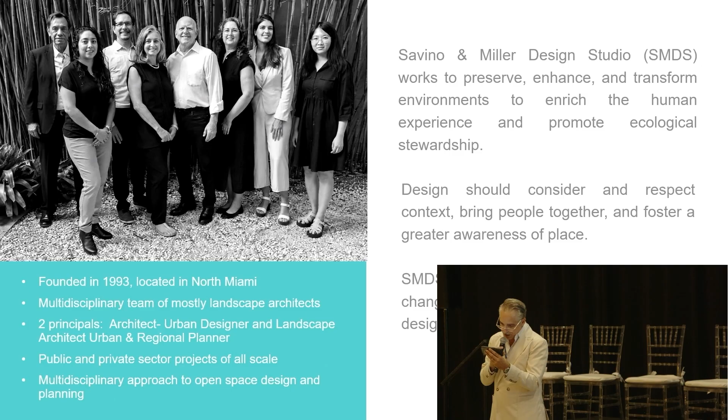Now, to help frame the panel, please welcome Patricia Matamoros, Brian Harrison, and Barry Miller from Savino and Miller Design Studio, a landscape architecture, urban design, and master planning design studio that works to preserve, enhance, and transform environments with purpose to enrich human experience and promote ecological stewardship. Their coastal resilient parks, such as Bayshore Park, Brittany Park, and various projects, showcase the role of nature and foster social connection with place without compromising nature.

Well, thank you very much. I'm Barry Miller. Joining me today, there's Brian Harrison and Patty Matamoros. These are the diehards here, right? Hanging in there till 5 after 5. So thanks for sticking around. As a Miami native and have been working here for God knows how long, right, Aida?

We're really excited about this opportunity to speak with like-minded people. A lot of the things we've been hearing today are right over the backstop in terms of data points and the science of it. But it's great to see that you're all communing together for a common cause. What's the common cause? We want to protect and restore Biscayne Bay. That's number one. So we want to do everything we can to do that by shaping policy and trying to move politicians and the grant funders, et cetera, to fund these projects.

How do we do that? We think as landscape architects, we want to make the site enjoyable. We want to make it fun to go to, useful, recreational, et cetera. That builds consensus. When you do that, that's when people start to come together and talk to their politicians of how great this is. Can we do this here? Can we do it in my neighborhood?

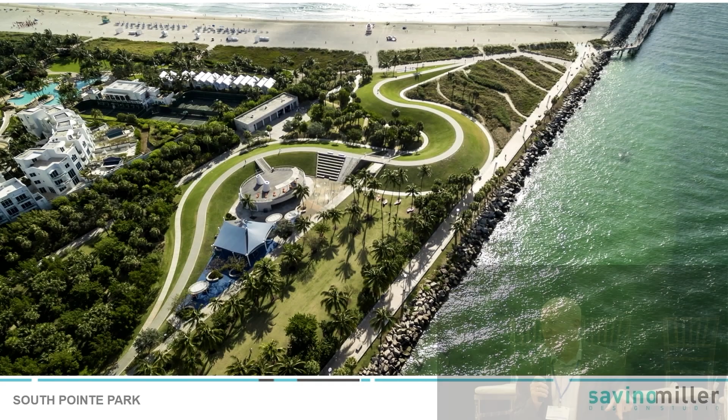That was raised about 2 feet next to Smith and Wollensky's for that first line of defense for storm surge, and the artistic landform above the coastal dune, which was an amazing kind of intervention that we threw in there. Before, in South Pointe Park, you couldn't even see the ocean. So this enables you to see the ocean all the way to Miami. So it's become a real destination place to go.

Coastal habitat, coastal dunes, and the first line of defense. Coastal dunes to the right there, and coastal hammocks for bird habitat and wildlife habitat.

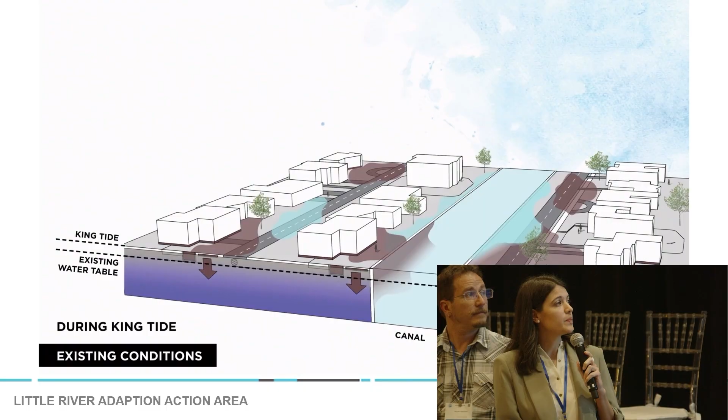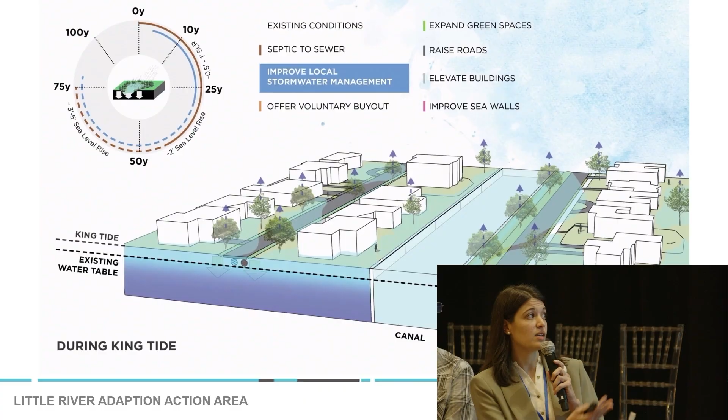Next. Patty. So also interconnected are the tools to address our urban land and the challenges that we face today. So we're used to seeing a baseline that is like this. We have systems like septic tanks that are working at their capacity, but as soon as you introduce a stressor like a king tide, a rain bomb, or a hurricane, then you're left with flooding and leaching into the bay, right?

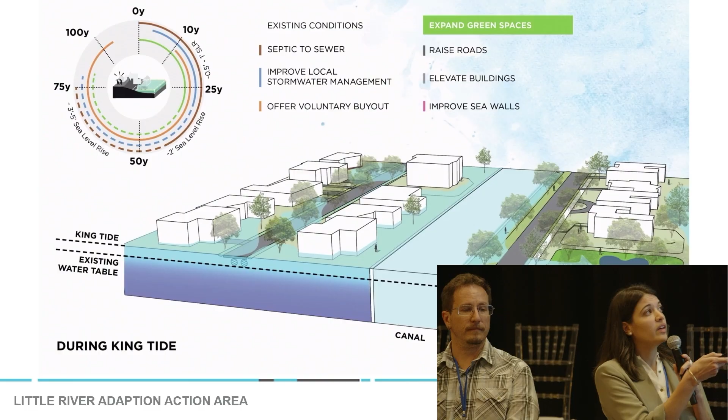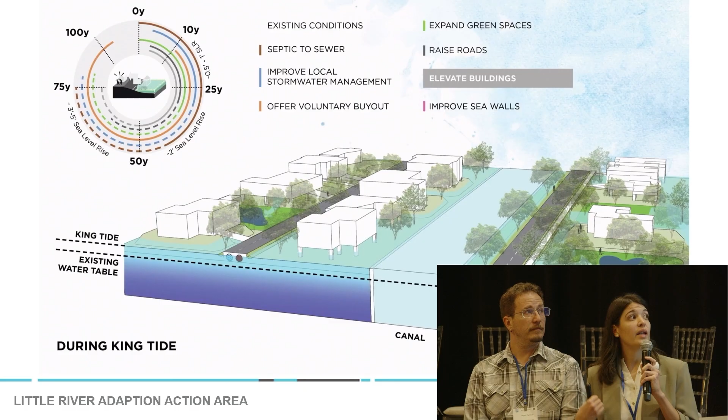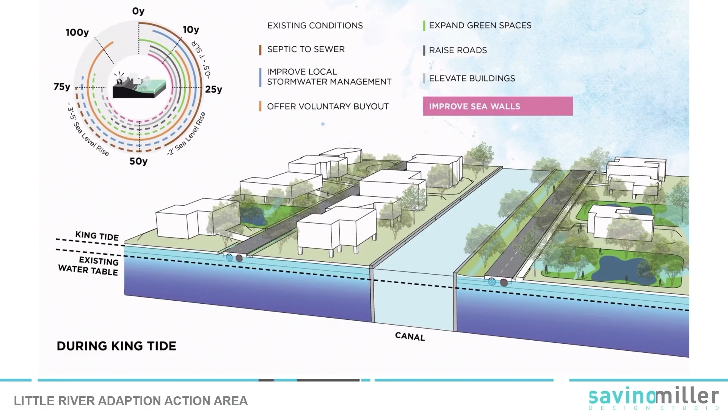So we can work with incremental solutions that get implemented as funds make themselves available, and as you get buy-in from the community and the right policy, so that they all come together as a system in the end, but also understanding that through a timeline that goes several decades in the future. And this macro vision goes from planning, right?

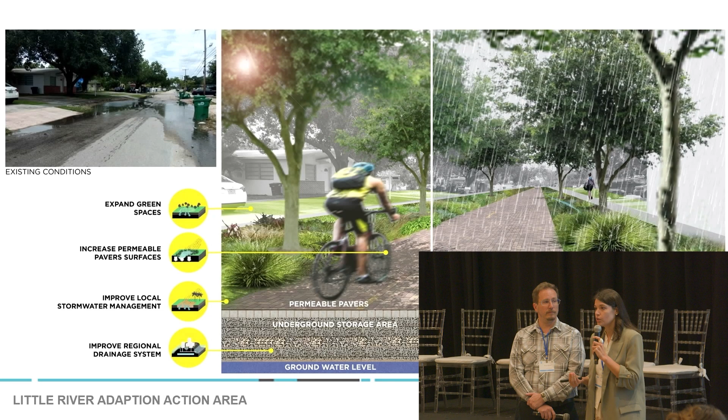But also to the micro decisions, such as what type of materials you are using, or how you're designing swales to increase permeable surfaces and improve local stormwater. And as Mayor Higgins reminded us this morning, we need more permeable places, and we need more permeable pavers in our cities and in this region. That allows us to recharge the aquifer. You've heard a lot about this. But again, back to the incremental, right?

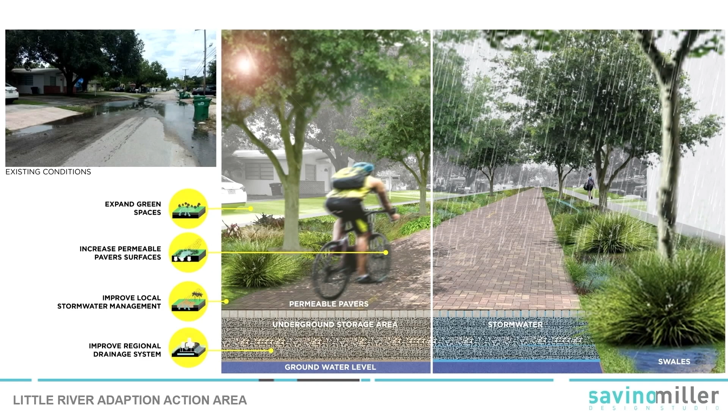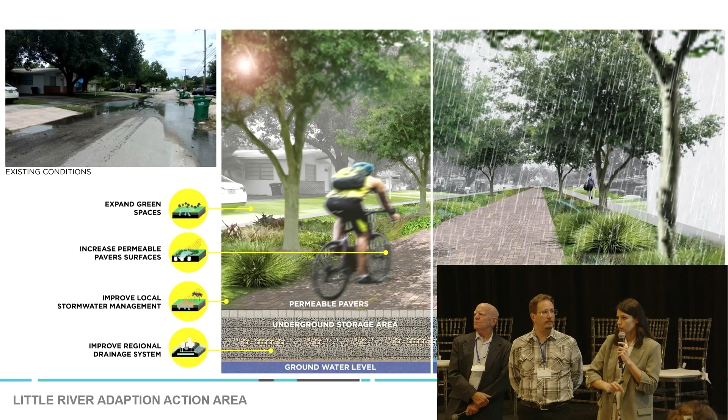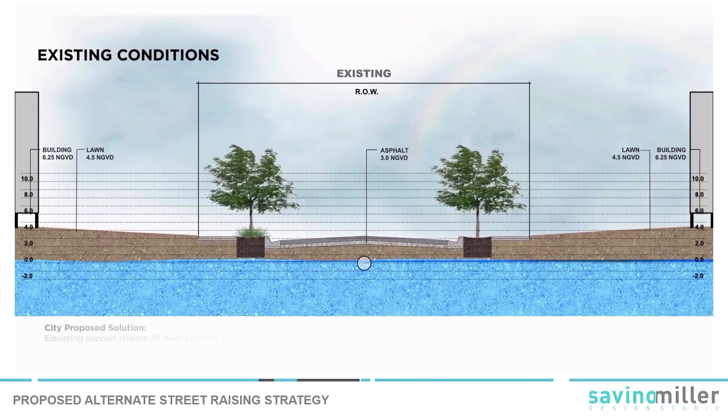We have this proposal. We're going to play a video for you right now about how it's not just in how you select the material, but also how it can be implemented through time. Back in, I think, 2013 or 2014, raising the streets, asphalt roads, 2 feet right off the bat. We've been working on like 3 or 4 projects like this. We're working on West Avenue right now. A pain in the neck in terms of harmonization to the properties adjacent to it. This has been the big problem.

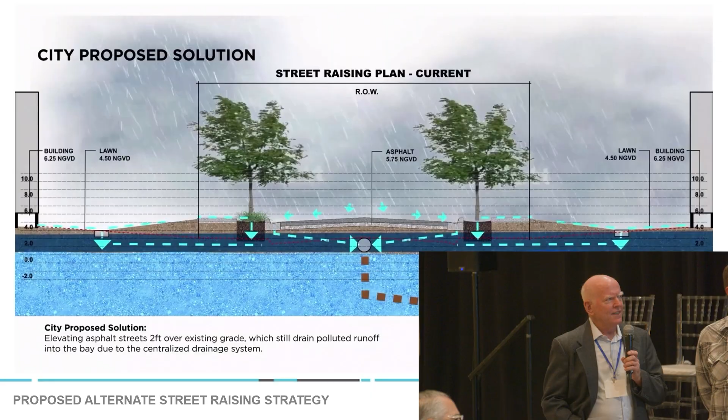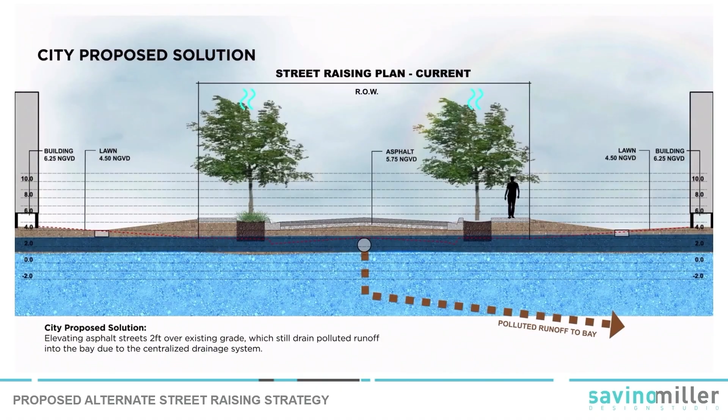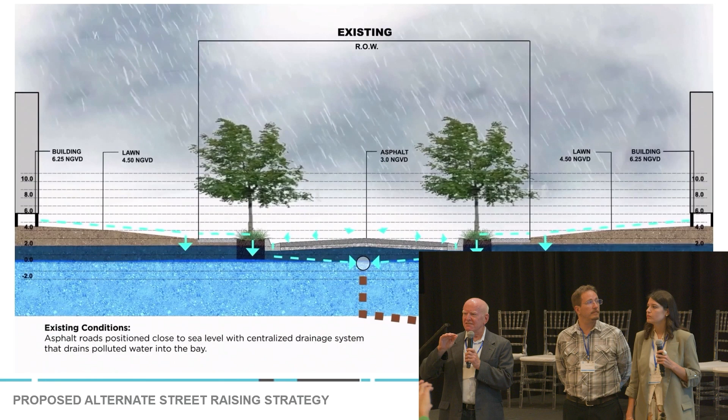So what we're proposing is, there's the water going, I'm not even close to the video. The idea is to put permeable pavers down once every 25 years, every street life. That's how long they last. Rather than raising it 2 feet every 50 years, once every 25 years is nice and gentle. It doesn't have problems with the harmonization. It gives time for the adjacent neighbors to rise up, which they're doing now as the floor levels are coming up. So we're proposing that rather than do that, do it twice, put the permeable pavers down.

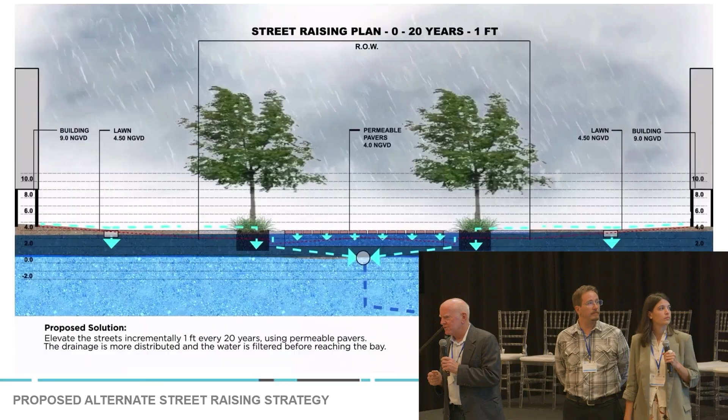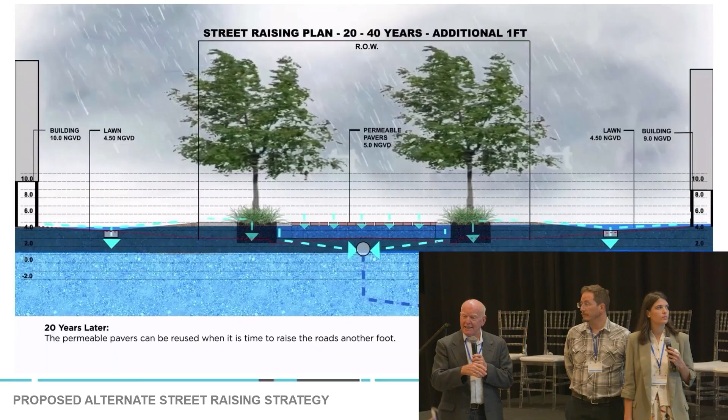Then 20 years later, when seas are rising and properties are rising adjacent to it, we reclaim the pavers. These are concrete pavers, just like they do in Greece and Rome and everybody else. They use stone, hard pavers, and they use them for centuries. We put them off to the side, we raise the streets, we put the reusable pavers back, gently raising it 1 to 2 feet. So it's an incremental approach that has a lot less carbon footprint, and also a lot less polluted stormwater first flush water out to Biscayne Bay.

I'll preface that by saying, I'm not sure if you all remember, in 2015, the city got busted big time. Henry Briceno, I heard his name earlier, the FIU. Yeah, he took pictures. When they built Sunset Harbor with that first rise, they had the plume going out, from the Herald. Remember the Herald? They showed the plume coming out in the entire thing, and they were threatening lawsuits. The city had to kind of back off and say, whoa, we got to rethink how we do these things.

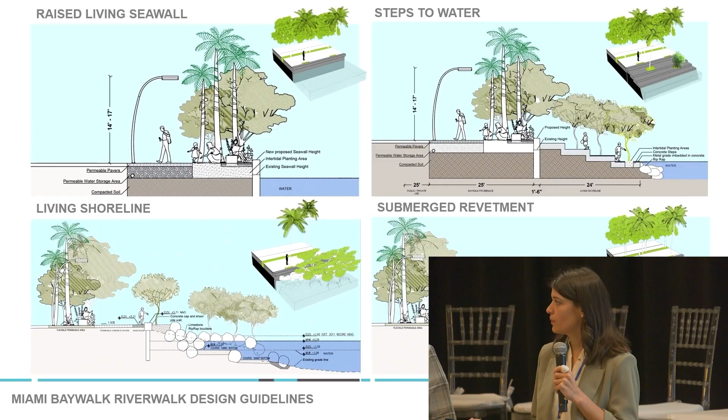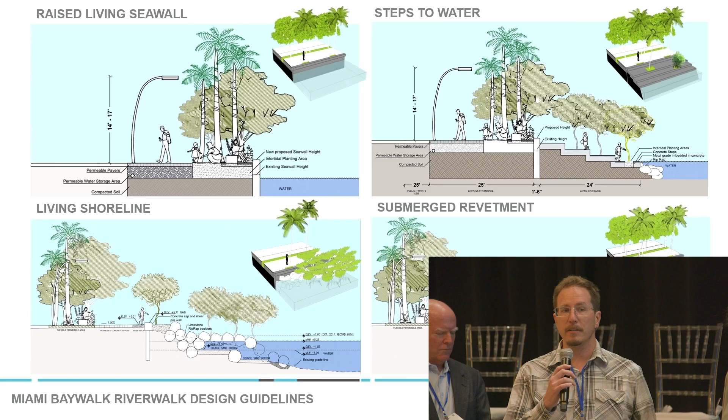And this project started in 2012. It allowed us to learn a lot of lessons that later informed what came to be the Baywalk Riverwalk guidelines. So, taking the lessons that we learned from this, we came up with a toolkit. We were approached by the City of Miami and the Downtown Development Authority to develop unifying guidelines, which are a flexible and adaptable set of tools, which involve living shorelines, permeable pavers, walking area, raised seawalls, access to the water, all in different combinations depending on the specific limitations, constraints, and opportunities of a site.

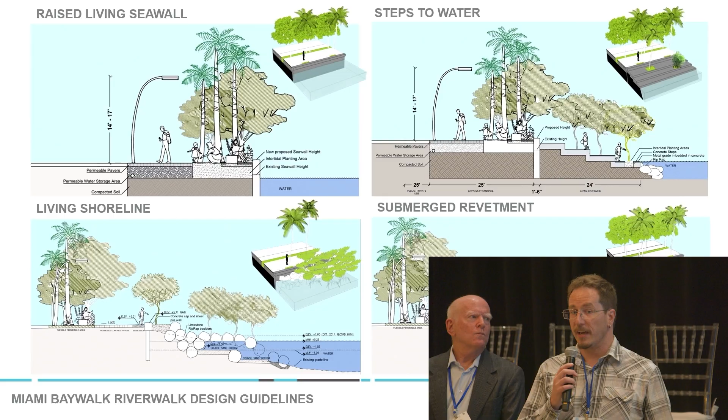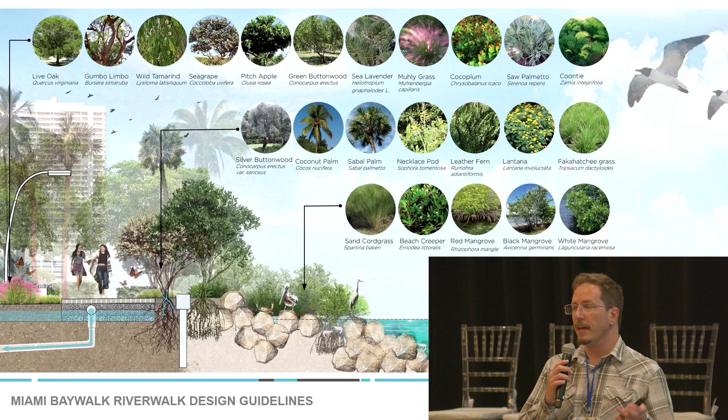All these things come together in an example using native materials to create a beautiful riverwalk or baywalk with unified lighting, paving, and other design elements, which was the goal, because as these sections of baywalk have been built, and I've worked on them personally, they only had a loose set of county code of what needed to be applied within this 25-foot sidewalk, and there's a discontinuity even from property to property. So these unifying design elements are now a toolkit that anyone who is developing along the waterfront can use to have a continuous looking baywalk within the city.

And coming together now is a video showing all these elements at the same time, just to understand some possibilities of what this could look like.

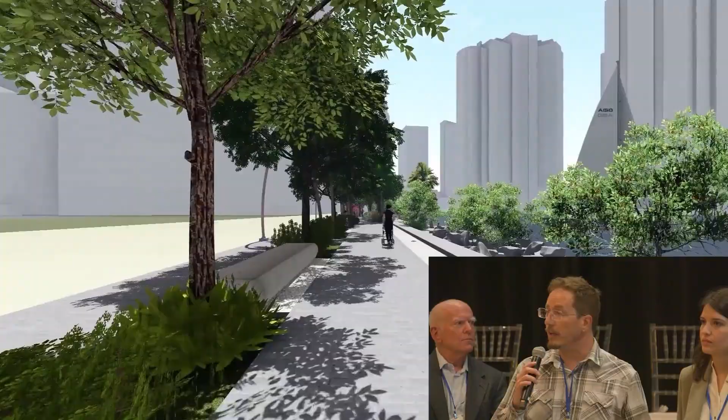No sound. There's no sound.

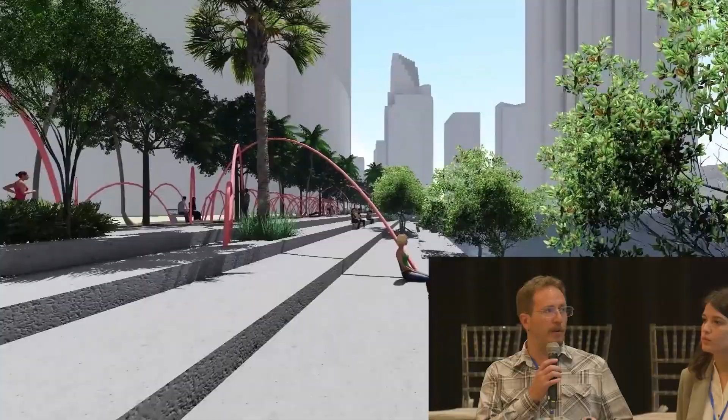Yeah, and also how these new technologies that we have now available and that we'll hear more about coming up can be implemented along this public space to also create more resiliency. It's important to be able to step down to the water, unlike the original Back Bay study that was talked about, where it would isolate you from the water with a big wall. The water is our lifeblood, it is our home, and we want to be able to access it. It brings so much to our life and experience here in Miami.

Adding to that, living shorelines, improving the ecology, creating cooler, shaded walking spaces along the waterfront in an otherwise hot urban environment, and being able to increase the native ecology. And again, public access to our waterfronts.

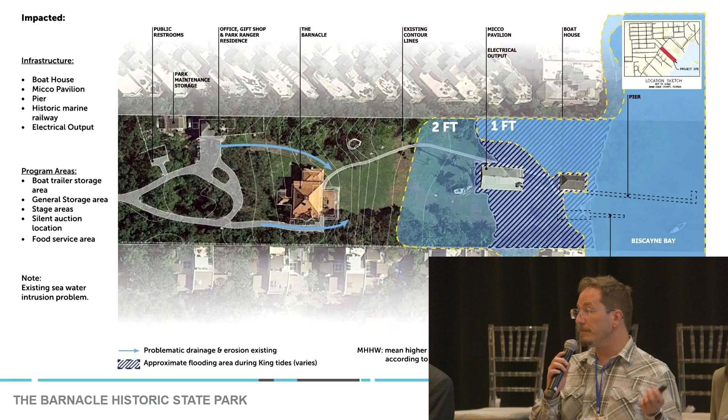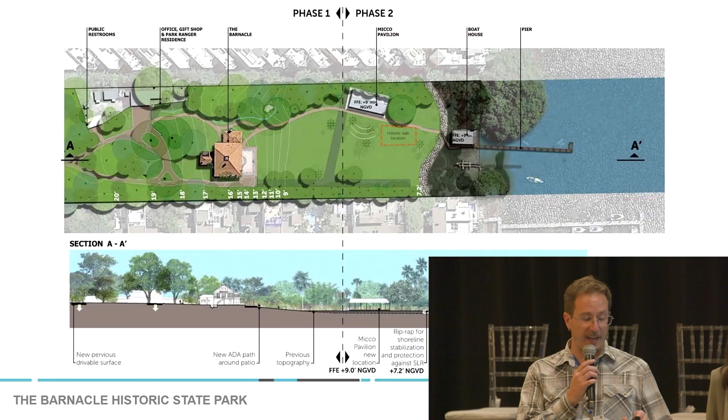Other examples that we have done and we're currently working on: this is the Barnacle in Coconut Grove, subject to flooding, surge, and sea level rise. And the proposed solutions here are to do on-site remediation as opposed to moving out into the bay, absorbing seawater on site, having raised and elevated portions within the site, and creating a living seawall, or sorry, a living shoreline.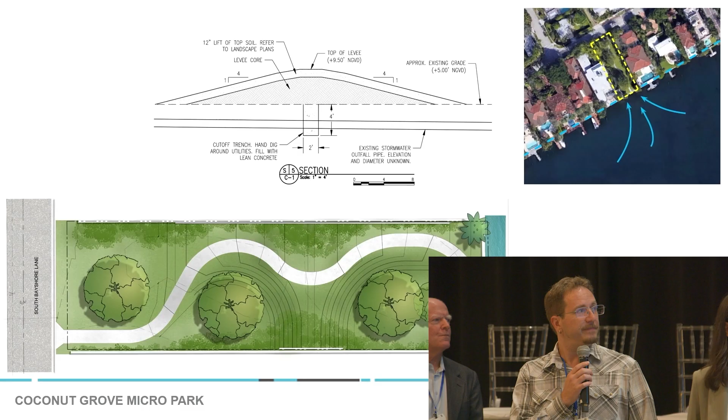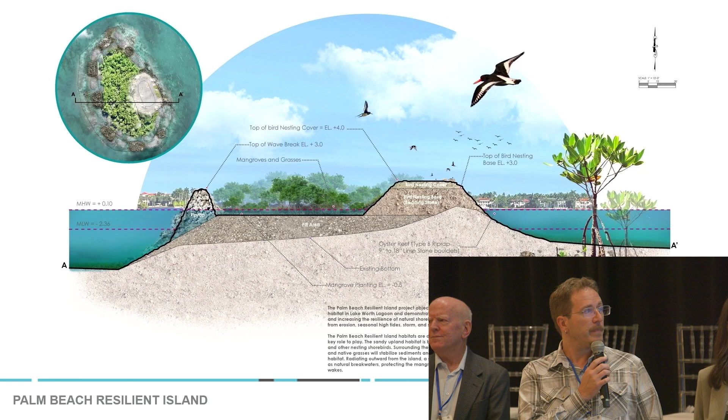Other examples of things that we're working on: the Palm Beach Resilient Island, which is done to create habitat and nesting habitat for the oystercatcher. And one that is still in the works now is Monument Island, where we're looking at doing a living shoreline here as well in order to help prevent erosion that's happening on two sides of the island.

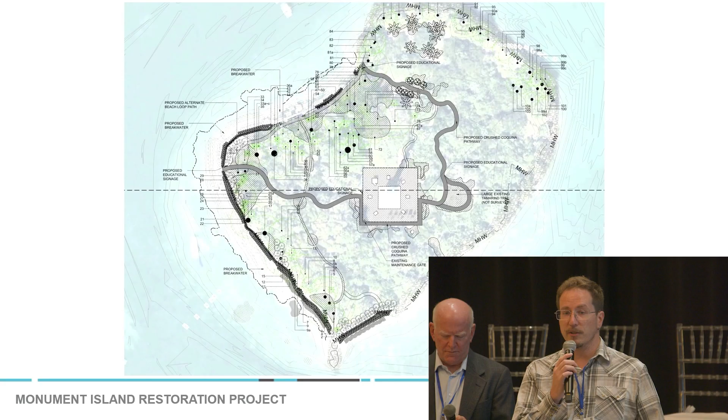We were talking about policy before, and not just the coastline or the shorelines. We're talking about buildings and developers, as we heard earlier. There's no reason in this wet, rainy environment that we have in South Florida that we don't find a way to incentivize green roofs, real green roofs. We've worked on a million amenity decks, with pools and whatnot.

The sad thing is, it's the last platinum building and the last real green roof we've worked on since then. No one wants to do it, okay? They want to put in this and that, and we keep on promoting it and trying it. And that's why we're talking about incentives and finding ways to give something to the developer so he has some kind of ways to monetize it.

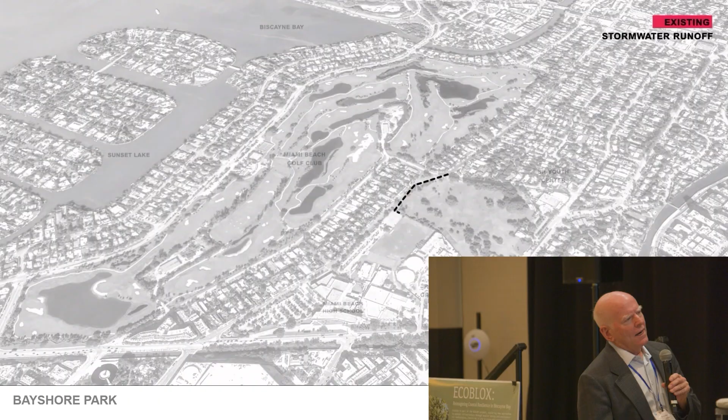This goes on to, Patty, let me see this. Okay, I'm not going to even try.

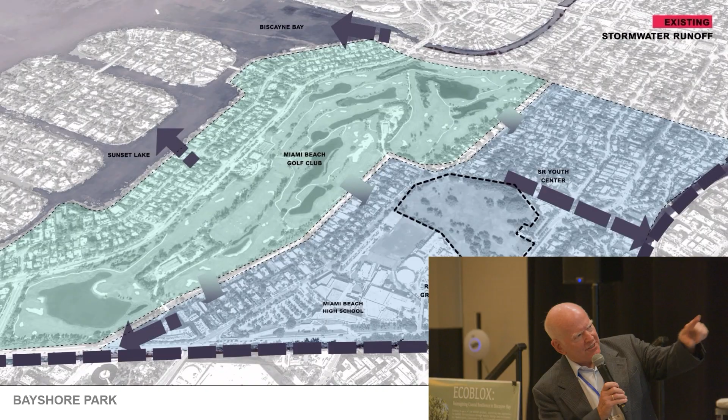Okay, this is the Bayshore Park, the dash line there, in the existing Miami Beach neighborhood, about 28th Street.

Okay, whoa, it's going way too fast. Can you stop it? Water flows. Oh no, huh? Yeah, that water flows. It goes fast. So

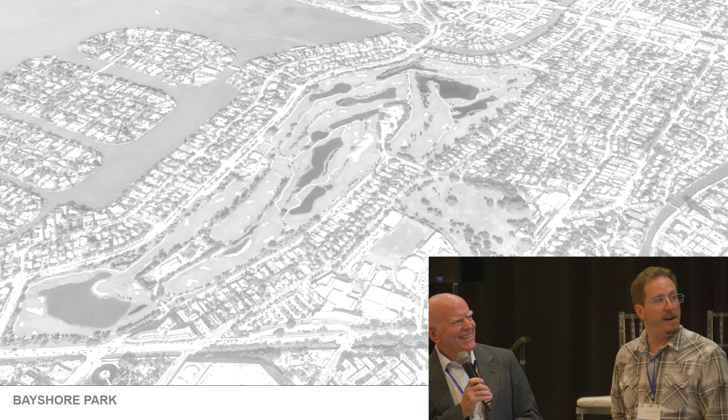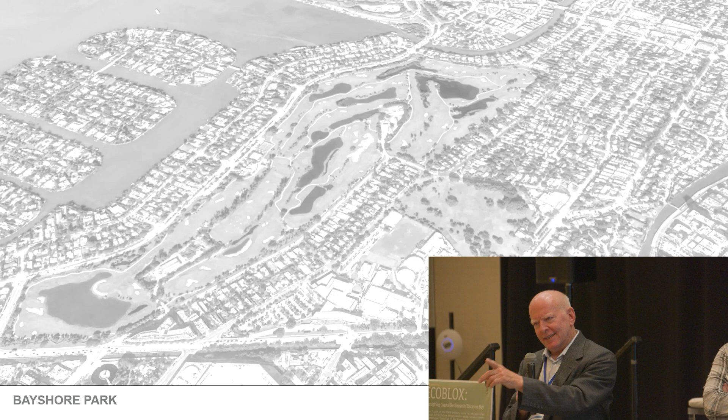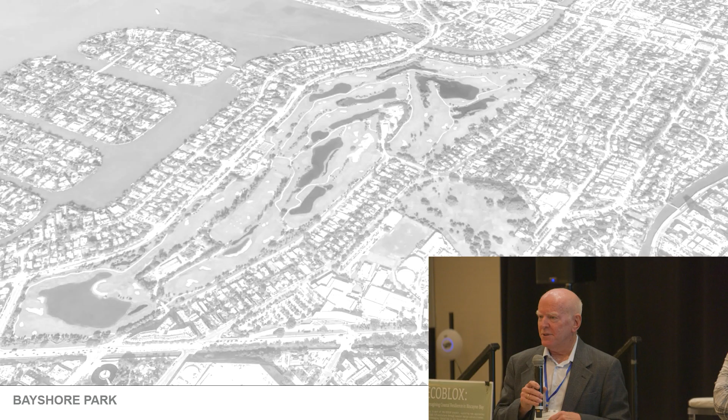As I mentioned before, talking about this plume out to the city, they got mud in their face. And when we got this project, we said, there's going to be street raising in this neighborhood. We know that. Okay, rather than sending dirty water out to Biscayne Bay, which the city got busted for, why don't we hold water somewhere? There's a 20-acre park, a former par 3 golf course, that we repurposed into basically a sponge park. This is back in 2015 or so.

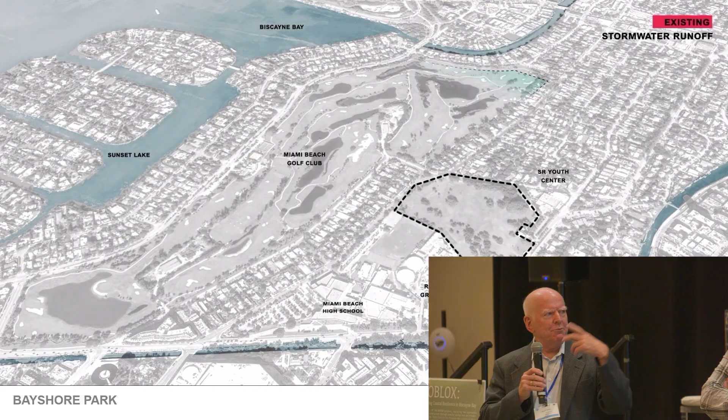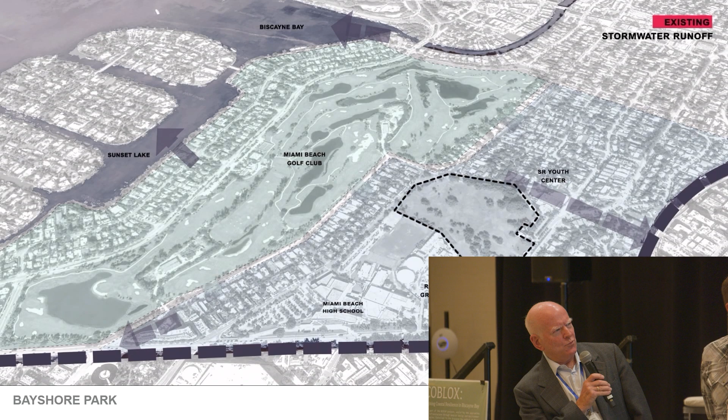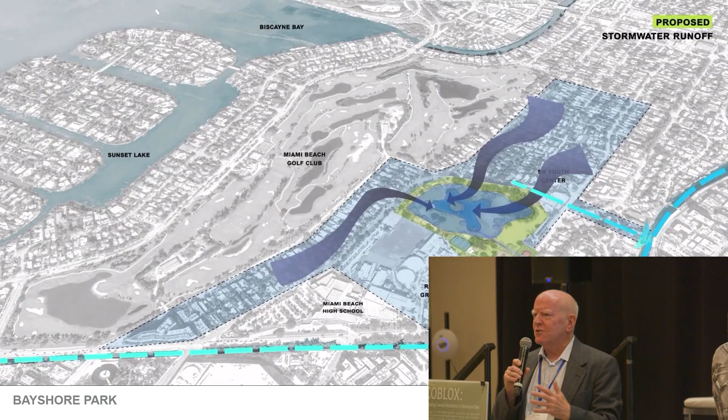Not only that, we combined it. We reached out and we created a watershed, about an 85-acre watershed in the neighborhood, way outside. You can see there's the dirty water going to the bay and the canals and whatnot. And then we create this watershed in light blue. We're sending all that water from that watershed into the lake with the street raising program. So it combines two big infrastructural projects in one.

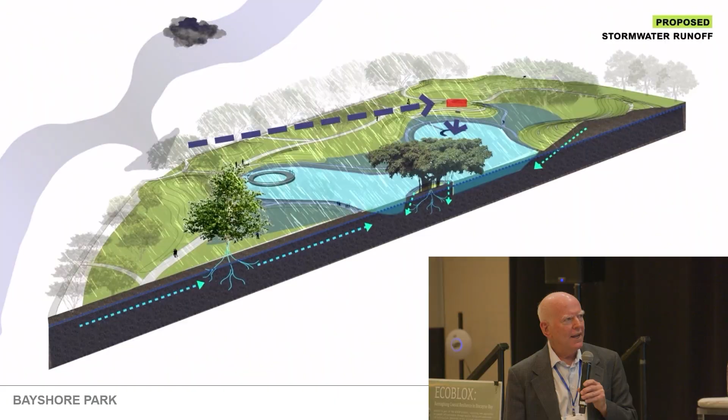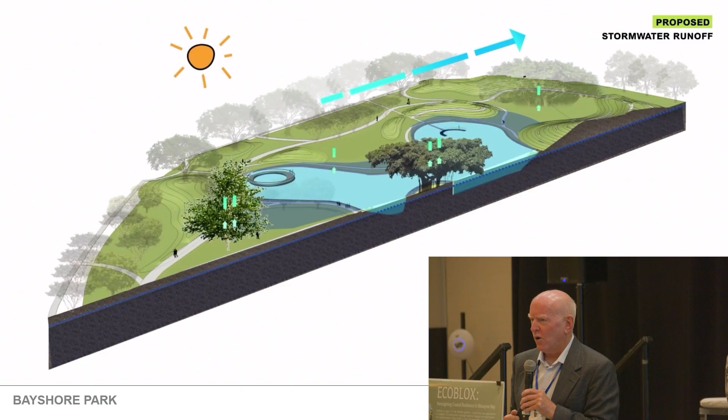This is a cross section here. We dug the lake. We put the spoils into these large landforms to really create a really dynamic landscape. And there's the water coming from the city up to the levee. It's 63 acre-feet that this thing can hold. That's a lot of water that's not going into the bay, first flush especially.

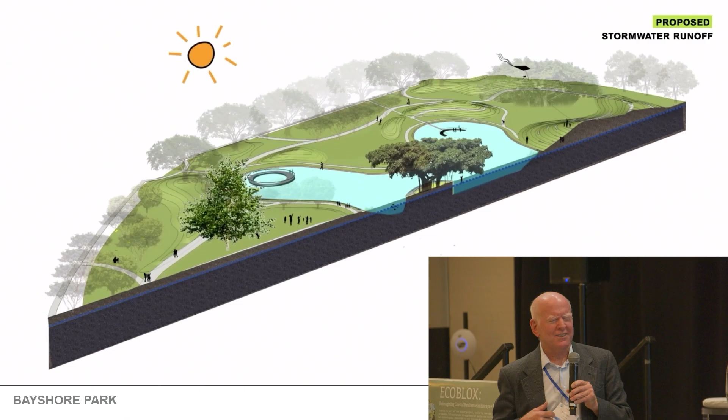So the first flush stays here. Anything extra after that, in the crazy storm, I think it's a 1-day, 25-year storm. I can't remember the exact, but it's been amazingly successful and just a real go-to place.